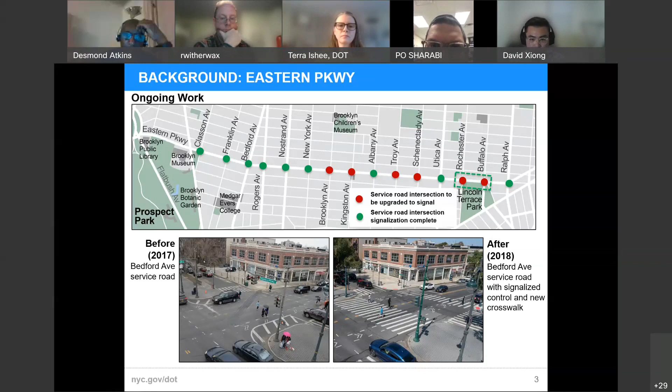Now I want to focus on the intersection of Buffalo Avenue specifically. It's a very busy intersection between all different modes. For vehicles, it's a major connector between Eastern Parkway and Rockaway Parkway. For bikes, Eastern Parkway is a heavily used bike path, and it also leads to multiple connections. For pedestrians, it's next to Lincoln Terrace Park, next to a handful of bus stops and the Utica Avenue subway station. Eastern Parkway is also a Vision Zero corridor.

Now, looking along Buffalo Avenue between Eastern Parkway and Rockaway Parkway, there are currently conventional bike lanes here that were installed in 2010. Along East New York Avenue, there's a handful of schools, and Rockaway Parkway, which connects to it, is also a Vision Zero corridor.

Now, the reason why we're taking another look at this, like I mentioned before, is due to a concern brought to us by NYPD about the amount of crashes here. If you look at the chart, they were absolutely right to be concerned. Along with the total crashes, there's been 1 pedestrian severe injury and 6 motor vehicle severe injuries, including 1 fatality that resulted from a speeding motorcycle losing control. We also analyzed that 75% of these pedestrian injuries were the result of a turning vehicle.

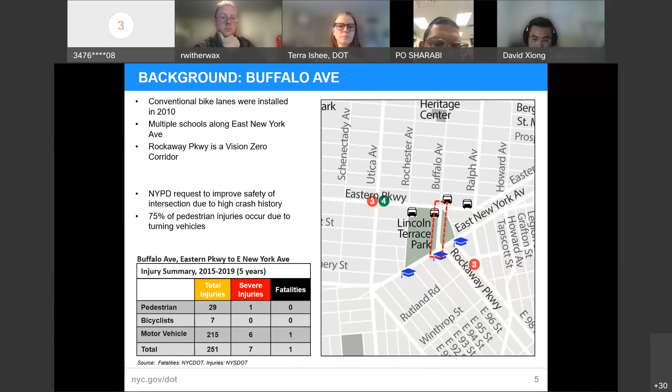Next, in order to prevent more crashes, we analyzed the nature of the roadway, and we identified some key issues that I want to go over with you.

Firstly, as with many of the intersections along Eastern Parkway, there are a lot of crosswalks that are uncontrolled. If you look closely at the photo of the southernmost crosswalk here, you can see that the crosswalk doesn't have a pedestrian signal, and these pedestrians did not know that the traffic along Buffalo Avenue was moving while they were attempting to cross.

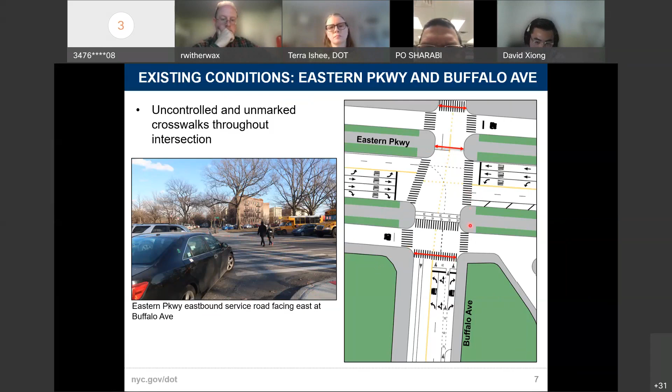The crosswalk between the northern medians is also missing, like we saw in the photo previously at Bedford Avenue. Next, at the crosswalk to the west, there is a lot of traffic that has to yield to the pedestrian, as in the photo, which makes it very uncomfortable for someone to cross.

Going northbound along Buffalo Avenue, there's a double left-hand turn, which really complicates things. From the perspective of these drivers making this turn, they have to account for a lot of things in their way: first, the car next to them also making the turn; second, the car going the opposite direction; and last but most importantly, the pedestrian crossing the street. This is the major cause of the crashes here.

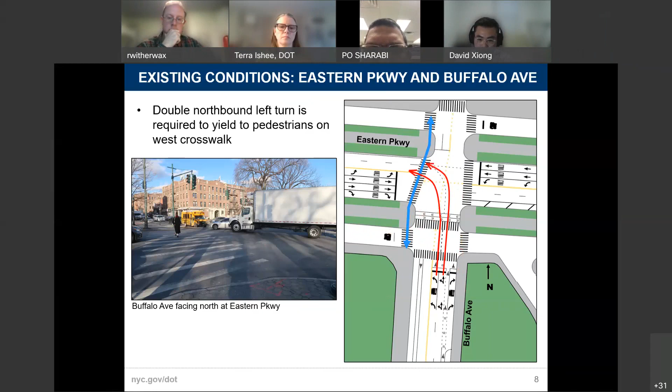Now looking at this turn as it approaches Eastern Parkway on Buffalo Avenue, the middle lane is currently designated for both the left turn and the cars going straight. When these two high traffic movements have to share a lane, they end up getting in each other's way. Then at the rightmost lane, designated for the right turn, you can see in the photo that it's practically empty and very underused, so there's a bit of inefficiency going on here.

Next, looking alongside Buffalo Avenue. Can I add one thing on that previous picture? Yes, okay, if we go back to the previous picture.

If you notice on the northbound lanes, we did a lot of looking at this because we heavily concentrate in that area, but we found it very difficult when the DOT did a little renovation at that intersection. On the northbound lanes, where you have the red box, there's a black stop line running across there. That used to be in the main body of the intersection, between the pedestrian crosswalk, before it hit Eastern Parkway.

Now what happens when you move that over: any car that gets stuck between that stop line and the intersection, meaning before Eastern Parkway, and makes it through the red light, we cannot issue them a red light summons because they're after the stop line, and we'll lose it in court. We've seen it time and time again, so we don't write the summons anymore over there. That stop line is an integral part of that red light violation, which most times occurs once the red light hits, they make it through, and then Eastern Parkway traffic begins, and they're already through, and we cannot stop those violators because they're technically after the stop line, and we will lose that in court.

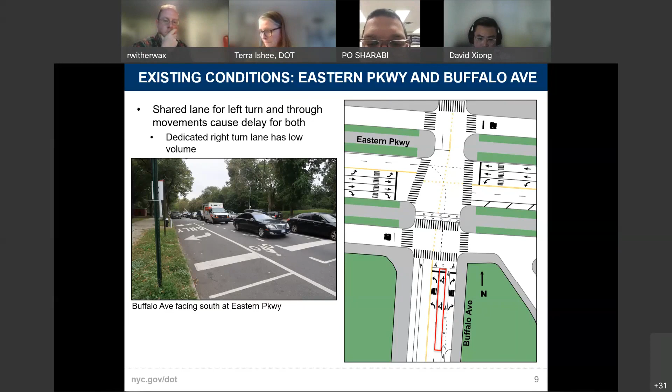Continuing on to Buffalo Avenue, there are currently conventional bike lanes that put the bicycles very close to moving vehicles. This road is also very wide, being 60 feet wide, and this creates a sense of a faster road despite it being the standard 25 miles per hour speed limit.

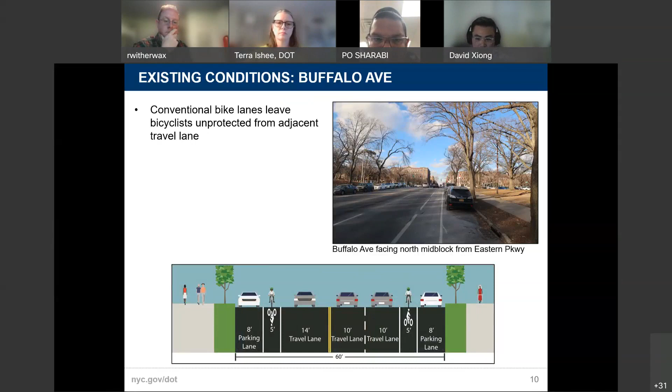Lastly, looking south towards where Buffalo meets East New York Avenue and Rockaway Parkway, the majority of cars and bikes here follow the curve of the road to continue to Rockaway Parkway. However, any car wanting to make a southbound right onto East New York has to go to the right of the split, which is very straight, and bikes are in the direct path of this. This creates a very difficult yielding point because it's a crisscross movement, and sadly, this was the cause of a recent bike crash here.

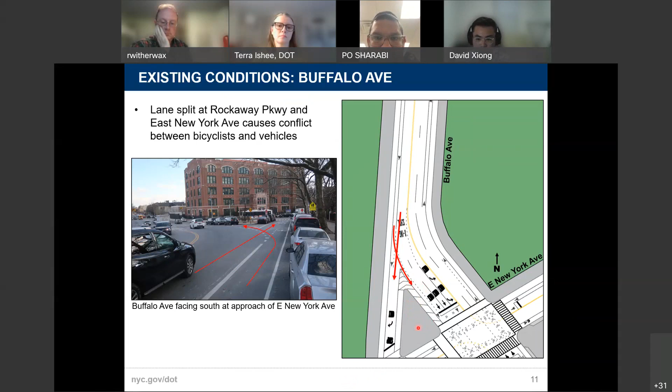Now that we've covered the issues in this area, I wanted to discuss what we can do to fix them. This project will be constructed through our in-house program by DOT staff. It includes the following options in our in-house toolkit: crosswalks, traffic signals, pedestrian signals, lane designation markings, protected bike lanes, quick curb, which are these vertical white barriers, and painted curb extensions.

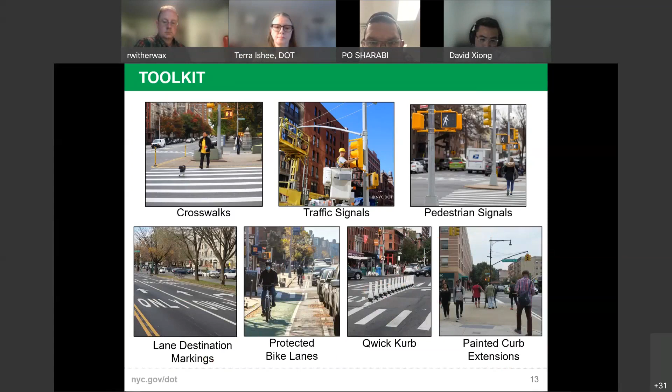Firstly, the rightmost lane would be changed from a right turn only lane to a straight and right turn lane. We previously saw how little the right turn lane was used, and how the left turn and the straight vehicles were in each other's path. So by moving the straight vehicles to the right, it better distributes the traffic waiting at the signal so that they can better and more efficiently clear it.

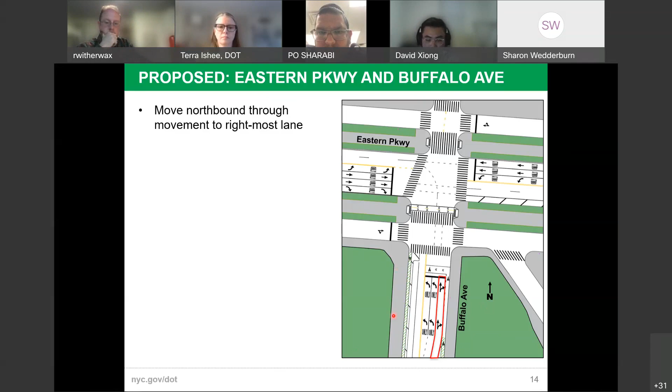I'll add one more thing to address your question about the stop bar. Let me go through the next slide first, and I think that will give you a better picture of what's going on. Another thing we're doing is the double northbound left turn will have its own phase, separate from any conflicts. This means the pedestrians walking along the west crosswalk will have a separate phase from these double turns. I previously mentioned how many obstacles a driver making the northbound left has to watch out for. With this configuration, they only have to watch out for the car next to them.

One more thing I want to add to answer your question about them passing the stop bar, this black line here, and getting stuck in the middle of the intersection. It's not mentioned in the presentation, but in the signal timing, there will be a second or two delay for them to clear out before the east and west phase starts. So it gives them time to just clear the intersection, get out of the way. Nobody else is moving just yet. Hopefully that would solve the issue of cars sitting in the middle of the intersection while the other cars have the green light.

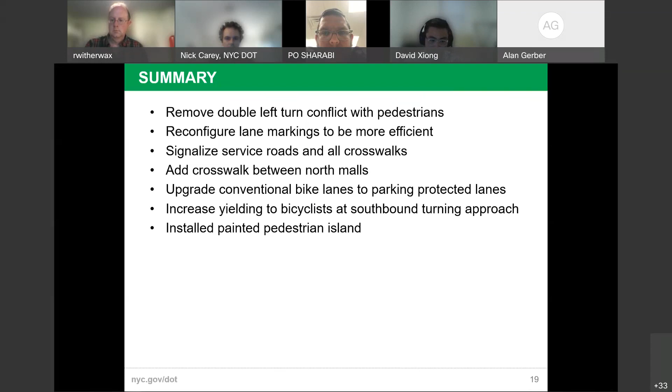So in summary, the double left turn conflict for pedestrians will be removed. The lane markings will be more efficient through reconfiguration. Service roads and all crosswalks will be signalized. The crosswalk between the north malls will be added. The conventional bike lane to park will be upgraded to parking protected lanes. We will increase yielding to bicyclists at the southbound turning approach, and will install a painted pedestrian island to the south.

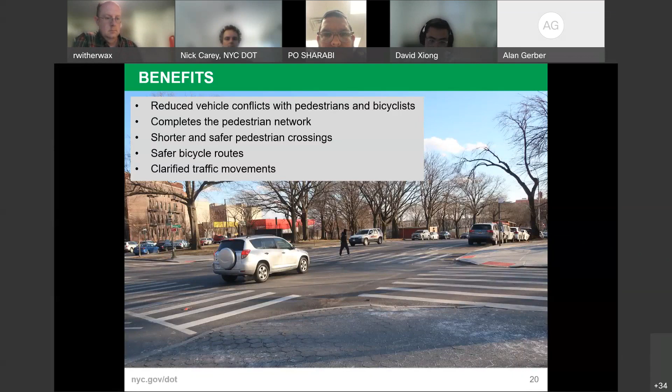And the benefits are that it will reduce a lot of vehicle conflicts with pedestrians and bicyclists. It completes the pedestrian network. It creates shorter and safer pedestrian crossings, safer bicycle routes, and it clarifies a lot of traffic movements. So, yep, that's the end of my presentation, and I'll answer any remaining questions.

Great, David, thank you so much. That was a great presentation. I hope it was clear. There was a lot of, I hope you can read the chat, because there was a lot of good constructive feedback in the chat from people who live around here, and I think are giving it a couple thumbs up.

There was one question in the chat: will you include any overhead signage indicating the flow responsibilities, especially on the northbound flow of Buffalo Avenue as you're getting up there, maybe a hanger over the roadway to say, look, here's the demarcations? Is that something that's likely to be included?

Excuse me, Rob. Rob, Mr. Atkins, was that your question? Yeah, that's my question. And that going uphill there on Buffalo is one of the prime areas.

It's basically the indicator for the major thing people don't like, the fact that they consider it too much confusion, and it destroys the scenicness of the area. But if all it takes is one driver who's not familiar with that intersection, whether they're from out of town or they don't drive in this section, if you have the usual signage on the ground and you're approaching, sometimes the traffic is too close to have any thought of what you're approaching and what you're responsible to do. And it's not always easy for people to change lanes if they find out they're in the wrong lane. That is another cause of accidents.

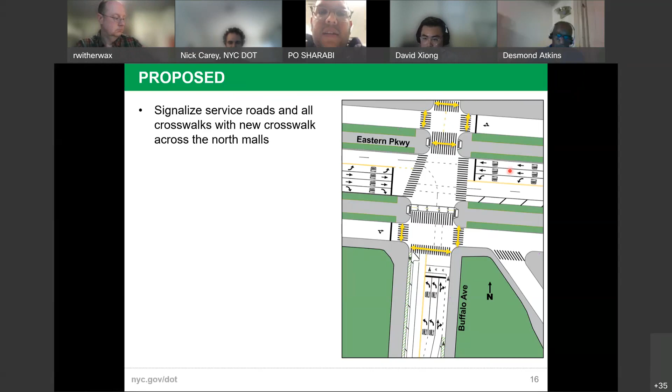We hand out literature. It's a combination. We did a two-day enforcement over there, one day enforcement and one day education. So we like to be even-handed with that. We're not interested in just giving everybody summonses, but we also want to educate them on what's going on. At that time we try to talk to the commuter van operators and try to clear them off that intersection. We do the best we can with what the situation calls for. But we are aware, and we're addressing that issue along with the 7-1 precinct, so that we're both sharing that intersection and on the same page.

Thank you, Mr. Sharabi. You're welcome. Thank you. Mr. Meehan had a question.

I have questions about why certain actions are not planned at the two intersections for full protection of the bike lanes, given that intersections are where the most conflicts happen. I can see there's some parking space - heading north on Buffalo Avenue, I can see drivers hugging the curb there, crashing into cyclists. Why was the decision not made to reallocate maybe four or five spaces to prevent future crashes at that location?

And if you can go down to the slip lane - next slide - what exactly is the minimal angle that someone could go from very right inside the Qwick Kurb to just outside that concrete barrier? Because that seems like still a pretty low angle of incidence, and I'm concerned that we're just going to see another crash in that location.

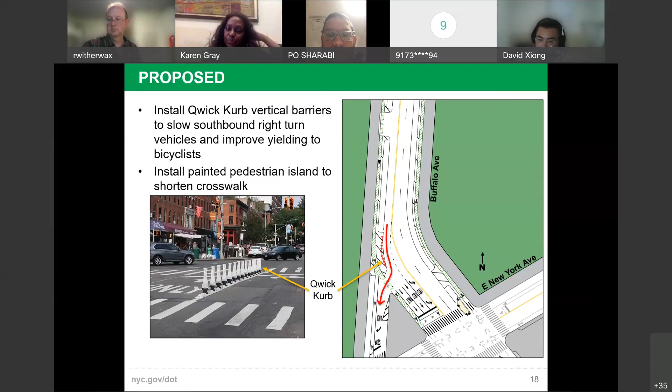The other thing I'd like DOT to address is the passageway from Rochester, where they play netball, that comes across to where the tennis courts are. It's like a shortcut to the subway. Do you know where I'm talking about? Rochester Avenue, yeah. Right there's a gray box passageway. A lot of people, especially during the summer, the traffic is extremely heavy.

Well, Mr. Dietz, you're getting a lot of thumbs up in the chat. A lot of people like this idea of a mid-block, halfway up the hill, maybe President Street aligned signalization, either on Rochester or both Rochester and Buffalo. Maybe that's another thing we can throw back to DOT on this. Definitely on Buffalo, that passageway that comes across from Rochester.

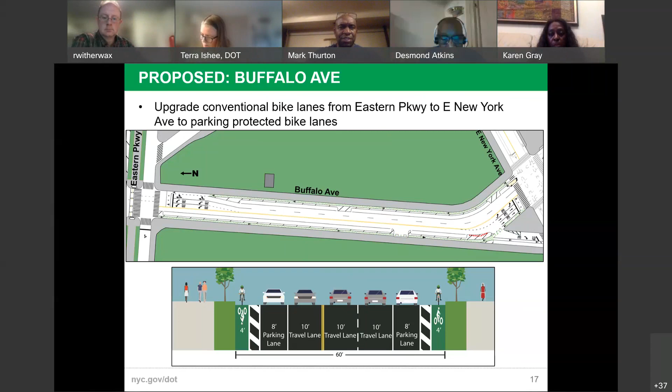And page 16, could you go to 16? I want to take a look at that. Is this telling me the yellow arrows are the pedestrian crossings? How about the one going east and west, where they don't have a yellow line - is that a crossing over there? Yes, that is a crossing. Where the yellow is, we're adding pedestrian signals where they don't exist now.

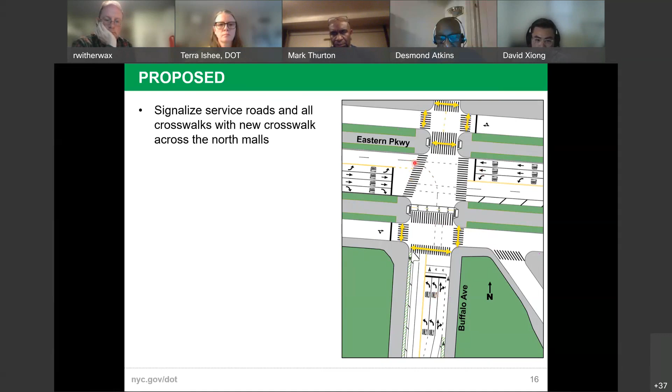Okay, what are you doing for this north and northeast crossing of Eastern Parkway for the pedestrians? That's where the real concern is, on the western side of that section. Right here? No, right, the big intersection - come on down. Oh, right here. Yes, so that is signalized right now, so we would be removing the double left turn conflict that they have. There's a lot of left turn traffic that comes here, and they don't have to account for that anymore because they'll have the red light as they're crossing.

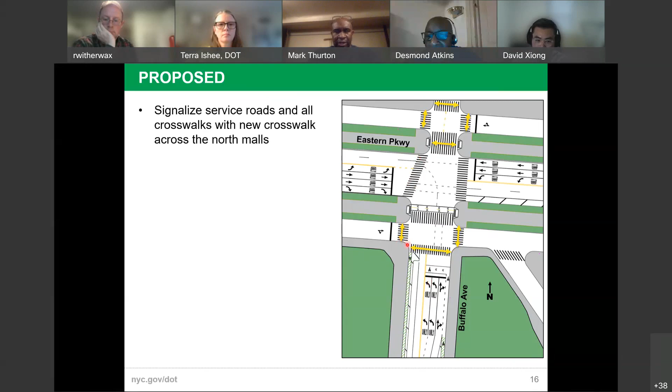Also, is there any way you can put a yield to pedestrian sign over there? Because once you get that double turn signal, it's telling everybody it's a green light go, and the pedestrians are on their own crossing that street - that's a major concern. The signage is good, but also put signage yield to pedestrians, because I've seen several pedestrians getting sideswiped in that area. That is a major concern over there.

Are you guys going to be looking at Rochester Avenue also, please? With Rochester Avenue, we presented in the past about this - it includes adding pedestrian signals all over the intersection, and pretty much this configuration with the crosswalks, signalizing the service roads so they're no longer stop signs. And with your question about yielding to pedestrians, the crosswalk and the double left northbound turn will be on different times, so there should be no pedestrian on that crosswalk while that left turn is moving.

Okay, and how long is this project going to take to be completed? We're aiming for this summer - it's probably going to take a couple months, and we're still seeing where the timeline is, how it's being developed.

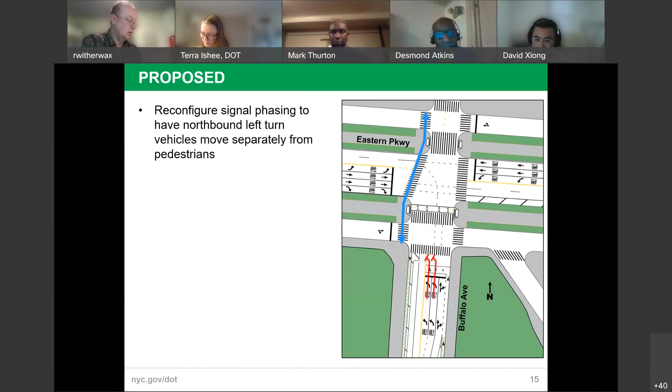And with that, I thank the members of DOT for their time tonight. Like I said, this committee will review the presentation and we'll try to get you some comments and criticisms in a written resolution form after our May meeting. But thank you for your good work. I think there's a lot to like in this.

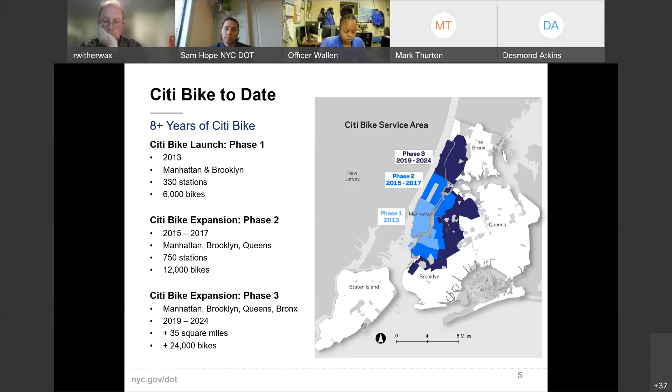Let's take a look at ridership. Citi Bike has been very successful and seen lots of growth in its members and rides per day since its launch. There are about 100,000 daily trips during peak riding months, and we have about 160,000 annual members. So we see that bike share is a mode of transportation that New Yorkers use and want, and the city is looking to support that demand.

Here we have a breakdown of the membership options. There's a single ride, which is just $4 for one point-to-point trip. Day pass options include unlimited rides for either 1 or 3 days. But the most popular option is the annual membership, which is $185 for a year of unlimited rides. There are also reduced fare memberships for NYCHA residents and SNAP recipients, which are just $5 a month for unlimited rides with no annual commitment, so users would only pay for the months they wish to use Citi Bike. Community Development Credit Union members are also eligible for a $5 a month membership.

Citi Bike participates in several community partnerships and programs, including community grants given to community-based organizations for engagement with low-income or minority populations. For instance, Citi Bike gives out partner keys to community organizations for expanded programming and education.

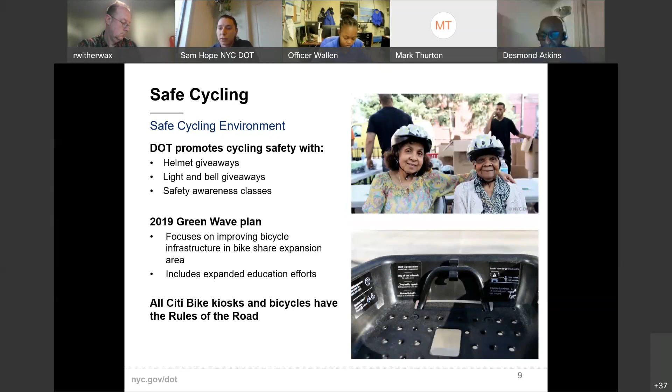When it comes to safety, DOT promotes cycling safety with helmet fittings, light and bell giveaways, and commercial cyclist workshops. And the 2019 Green Wave Plan focuses on improving bicycling infrastructure in the bike share expansion areas.

So let's take a look at our planning process, which is laid out in these 4 steps.

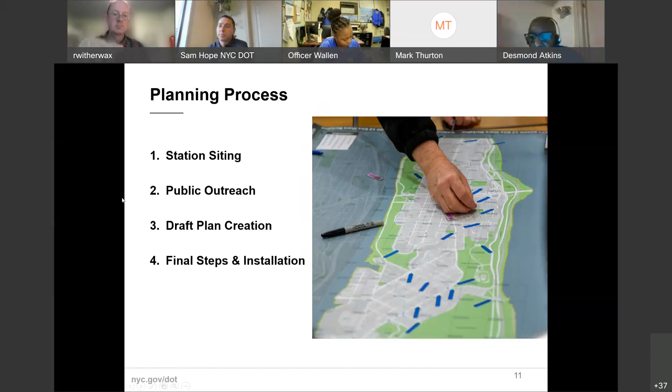Station siting: station density is at the core of Citi Bike's success in providing a reliable and consistent network of bikes for users.

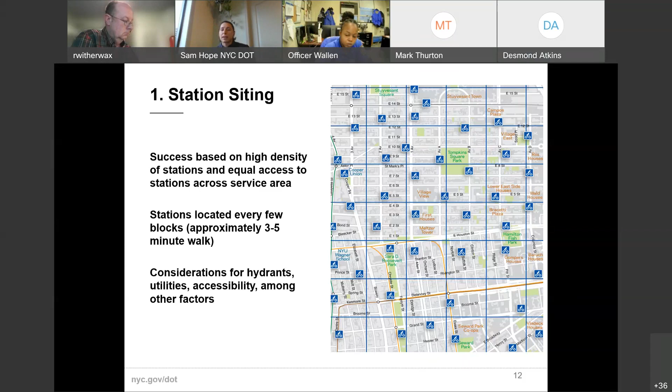We want to provide people access to bikes at both the beginning and end of their trip, so when someone is in the service area, they're generally a 3 to 5 minute walk away from a station. To achieve this density, we use a grid showing an approximate 3 to 5 minute walk, and try to place 1 station per grid to keep consistency. To deal with differences in demand, we adjust station size so larger ones are at major destinations like transit hubs. When choosing areas for stations, we consider distance to hydrants and utilities, ADA guidelines, and pedestrian clearances on sidewalks.

For public outreach, DOT conducted in-person outreach with our street ambassadors team and via our interactive feedback portal, which was promoted on DOT's social platforms and shared with electeds, the community board, and a variety of local stakeholders. Participants were able to nominate locations for consideration or note areas where a station might not be suitable, and this feedback guided the site selection process.

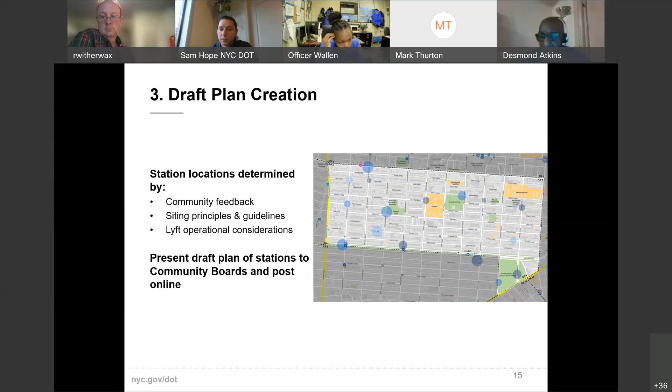Phase 3, draft plan creation is where we are now. After identifying all available space where a station might go, we overlay that with community feedback as well as Lyft operational concerns, then take out any less preferred sites and use the remaining ones to select our draft plan map. We'll get to that draft plan in just a few slides.

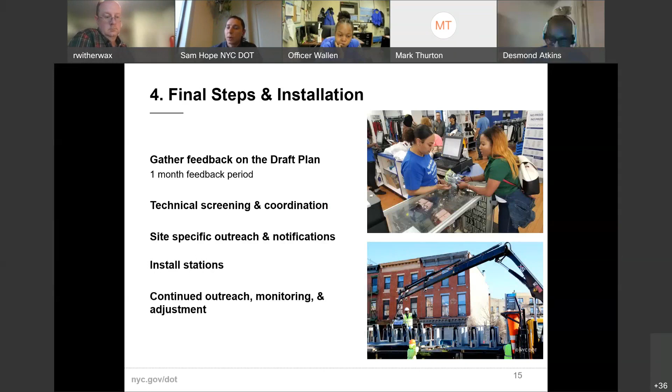But first, our next steps after this presentation will be to gather feedback on the draft plan. We'll then do a technical screening of the sites, release our final plan online, do site-specific outreach, and notify buildings of adjacent properties where stations will be placed. Then the stations will be installed and we will continue to do outreach and monitor the stations, making adjustments if necessary.

So let's take a look at the draft plan. Here's an overview of the entire map, and then we'll go through some more zoomed in sections so we can get a look at individual stations. Just to note, this map is also available online at nyc.gov/bikeshare. We have 3 zoomed in maps to go through, so we'll take a brief look at all of them and then circle back to any you want to take a closer look at.

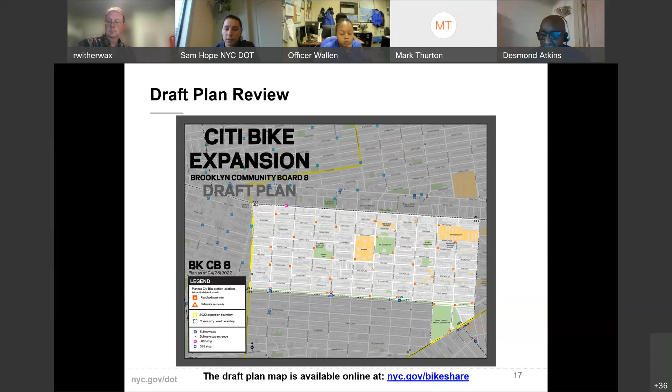So there's our draft plan. We're happy to take any questions now, and we can go back to any of these maps to take a closer look.

Thank you, Sam. Thank you, Lauren. I'll start off with one obvious question that hit me.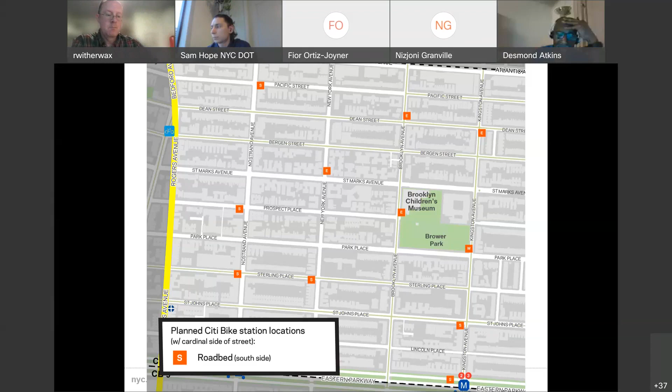What I would say is the designated EV parking won't be impacted. It's closer to St. Mark's where that's located, so that will be just south of the EV parking. But what I would say is we anticipate high demand for the Brooklyn Children's Museum as well as Brower Park for this area. Yeah, I think having 2 stations adjacent to Brower Park is a great idea, and the same thing for the density around St. John's Rec Center. Mr. Meehan also has another question.

I was wondering, I live further west, kind of where there's already Citi Bike, and I noticed that at the top of the hill, usually it's very easy to find an e-bike, but down at the bottom of the hill, it's very difficult to find one.

And so I was wondering what additional rebalancing resources there will be, and what the proportion of e-bikes will be, to make sure there's good availability, say for people with mobility issues trying to get up the hill. That's my fault, I'm the one who bikes the e-bikes up the hill all the time.

We're both from DOT, and yeah, the rebalancing is an issue. We see it everywhere, especially at tops of hills, where people don't want to ride the classic bikes up there. Lyft Motivate, the company that operates Citi Bike, is in charge of rebalancing stations. And as far as electric bikes go, 20% of the fleet can be electric bikes.

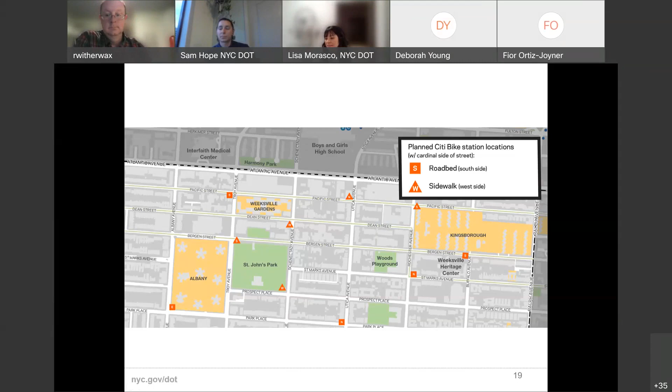Okay, I want to ask a question. I saw that there's a bike station proposed for Sterling Place, on the west side of Sterling and New York, and then another one, and I don't remember whether it was on the west or east side of Sterling at Nostrand. I want to understand why it's proposed so close together in those two areas. That's one question I have.

For a lot of those you see along those corridors, the biking infrastructure is directly related to feedback, where we heard folks wanting stations along certain corridors. In this particular instance, it's a function of proximity from one another, as you can see it's a pretty tight network, and we try to have things evenly spaced. It's not exclusive to Sterling Place, we also have two along Prospect Place. But what we really try to do is supplement the existing infrastructure and where folks are actually riding.

And I'll add that these are also flexible and fungible - if a certain dock isn't being used or is causing a problem, it can be picked up and moved somewhere else. Well, it seems that St. John's Place would have been better because it's a wider street. St. John's and New York is a wider street, there's more space, and it seems like it would have been more palatable to put one there and the other one on Nostrand Avenue and Sterling.

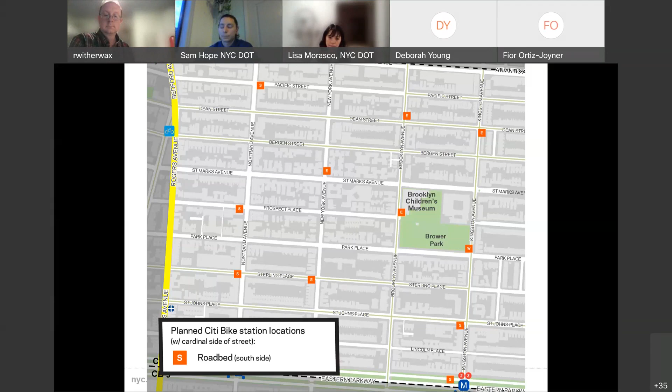The second argument I'm seeing in the chat is that this holds no water for you because you're looking at it from that point of view. I have a bicycle, I walk, and I have a car.

Economically, you can go out and buy a bicycle for $100 that's been put together. You don't need a corporation to come and decide they're going to help gentrify a community. And this is what's happening. You and I both know these things because we've had these conversations.

We've disagreed for years about this, Mr. Atkins. Yes, we've had some disagreements on several things, and you've only come back to say you were right, Mr. Atkins. I don't want to wait until all the people I'm thinking of are displaced, and then you come tell me you were right. If I'm the only person who's going to appeal this, they're not going to be ridden out of town on a Citi Bike. It's not going to be the trigger, no, it's going to be even worse than that. Probably a roller skate.

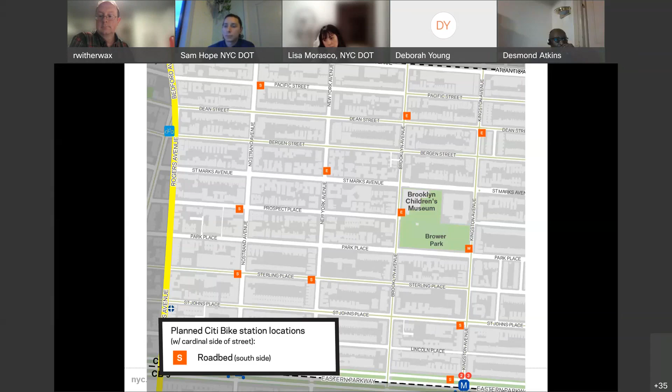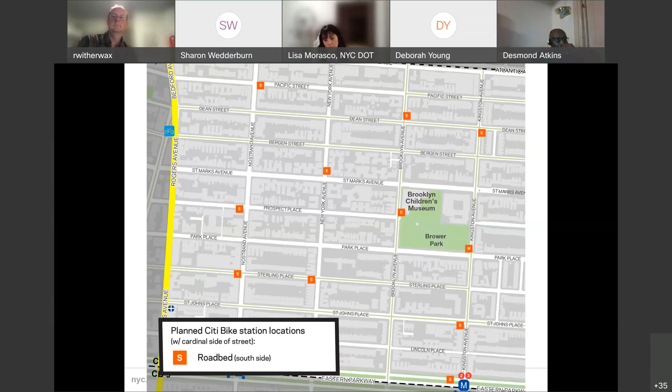So my question comes because we're not seeing any Citi Bike station locations near the Nostrand Avenue subway or near the Utica Avenue subway. Eastern Parkway is the dividing line for the community board.

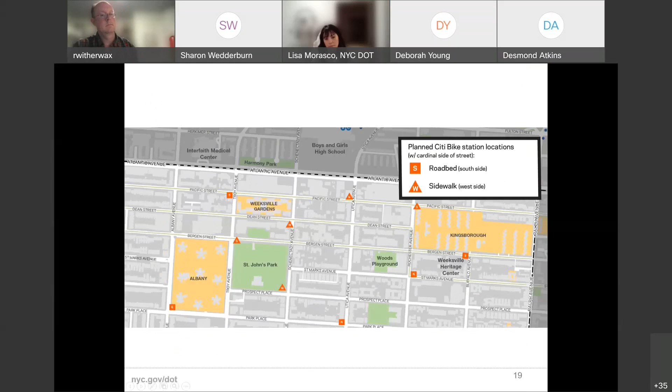So we can have a discussion about balancing. Sorry, we lost you for a moment. Sorry, someone tried to call me while I was on my phone. So what I'm saying is that I'm concerned about no siting of Citi Bike stations near subway stops, and to hear that it's going to be part of the Board 9 siting. And just thinking about Utica Avenue makes me shake my head anyway. But why is it that we don't have that information about possible siting when it can so adversely affect a shared asset, meaning the subway stations along Eastern Parkway?

Because certainly we're talking about looking at re-sitings and revisiting specific sites that are called out, but we have no opportunity for input for something like that at this moment.

Okay, we're in the middle of site selection for Community Board 9, and that'll be available in the same fashion that it is now. After we present our draft plan to them sometime this summer, then it's publicly available, and we'd be looking for feedback on that as well.

So does that mean that the installation of the Citi Bikes in Community Board 8 will be delayed until that happens? Or can you possibly identify the sites in Community Board 9 that are located near the shared subway stops in Community Board 8 for consideration at this moment?

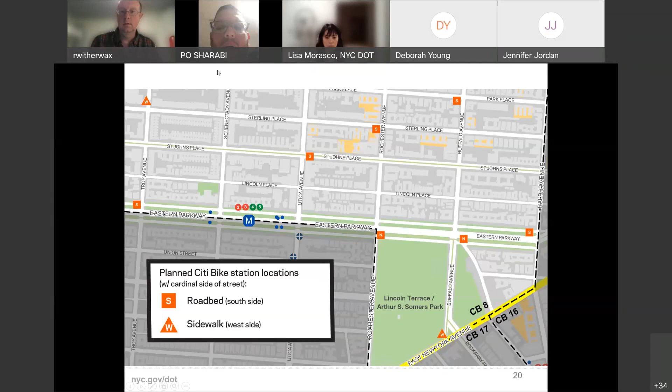You're looking for David Chung? I don't think he's on anymore. Yeah, I think he's left. Thank you. Other people from DOT will reach out to them and make sure. Once I get it, officer - this is Mark - I'll forward it over to the 77th precinct. I have put my email, I have your email also, and I'll send it to you. Thank you so much, Mark. I appreciate that. Thanks, Mark.

All right, thank you, those are all the questions. I just want to say that we're now collecting feedback on this draft plan map. It's posted online and we can send it to you as well. We generally like to collect feedback about a month after this meeting, so please take it back, look it over, and if there are any serious operational concerns with any of these sites, please put it in writing, send it to us, and we'll take a look at it.

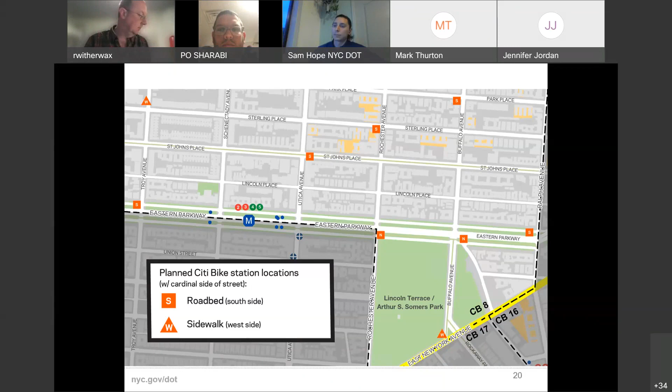Yeah, so we hope to be hearing from y'all soon. We'll do the same thing we're doing with the other proposal - we'll take a month, we'll absorb, we'll circulate this among the membership, we'll collect feedback, and we'll give you what constructive criticism we can.